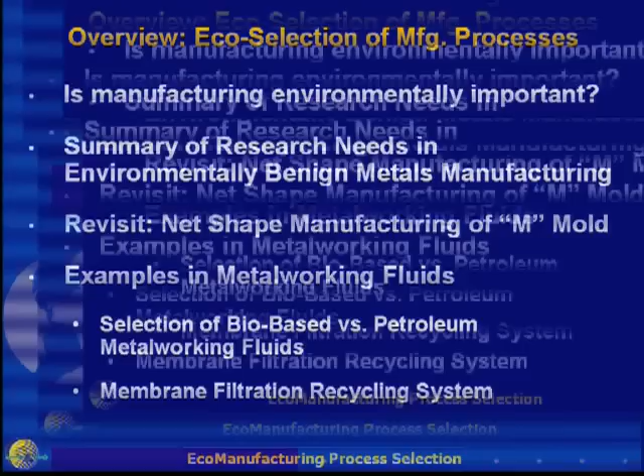Get into what needs were identified in terms of research in this area and environmentally benign manufacturing. We could summarize, and I think we only have time really to talk about metals, and we talk the most about metals this term. So we'll just summarize there.

We had a subgroup here of individuals who were involved. You see some folks from industry here. The big three are represented here. Some universities, government, EPA, and National Science Foundation, all represented here. And we basically sat down for a couple days. And

It's not feedback. All right. Not sure what that was. I don't have a cell phone on me.

Okay. Anyway, we sat down to talk about trends in the industry. And one of the big trends that the automakers noticed or brought to the floor was that they're really trying to get out of hard manufacturing. They just want to be assembling and designing, right? That's where the most value added is, where they can get the most return on the dollar that they put into it.

So we talked about the smart car, which is an extreme example of this. You just set up a campus, right? And now you've got different companies coming in and having some operations, and really it's a hub where all the assembly comes together.

There was a large degree of uncertainty identified regarding where products would be going, right? We've got hybrids now. We've got all sorts of alloys we can be using in the chassis. We've got fuel cells coming online. And more niche demands from consumers, so more variety in vehicle applications. So a lot of uncertainty they identified from the design standpoint.

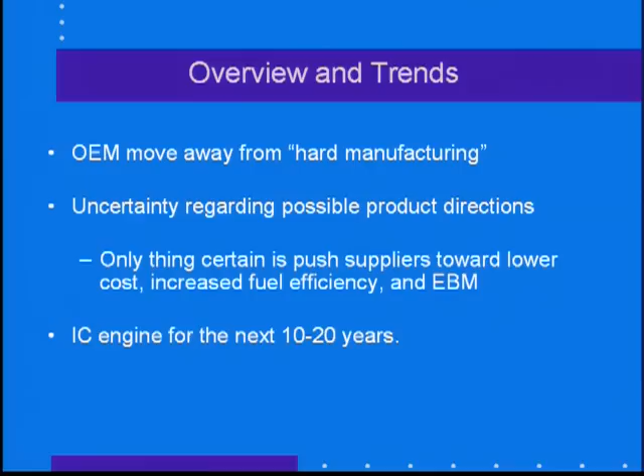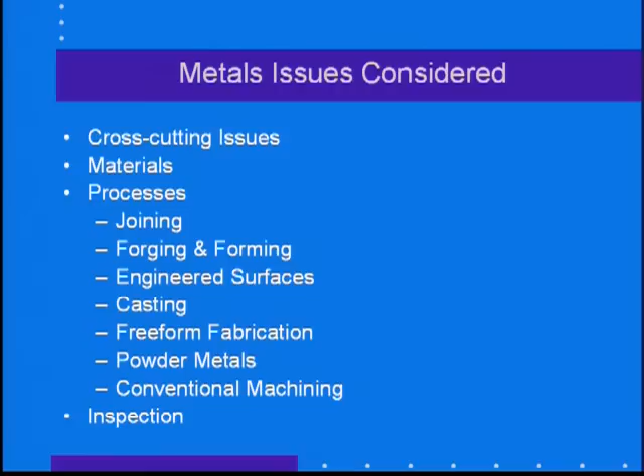We considered a lot of things in a couple days, cross-cutting issues, materials and processes, joining, forming, machining, freeform fabrication, casting, powder metallurgy, and inspection. But the overarching theme was what we've already talked about. I think the top two we've mentioned over and over again. The need for national priorities, not for any given company or designer to be setting environmental objectives, but for us to set some direction at the national level as a society, and partition those priorities into different industries and get everybody on the same page, essentially.

And then to provide tools and data for life cycle design support. What are the top priorities for a car? What is it in manufacturing, and what is it about the design? To enable designers to make these trade-offs. Those tools and data are largely unavailable. Process integration, hybridization, elimination. We've talked about net shape operations, eliminating downstream operations. That's what this point speaks to.

But supply chain relationships, especially as you have now decentralized manufacturing. What are the environmental impacts? Are you pushing environmental impacts now? You're essentially divesting yourselves from environmental impacts. So the supply chain relationship and understanding the impact of a given design on the total life cycle environmental impact of a product is going to get more difficult.

And education at all levels. What is the environmental impact? Tends to be lacking. Okay. So I don't think these are really prioritized. This is just a list of priorities. It's not necessarily in an order.

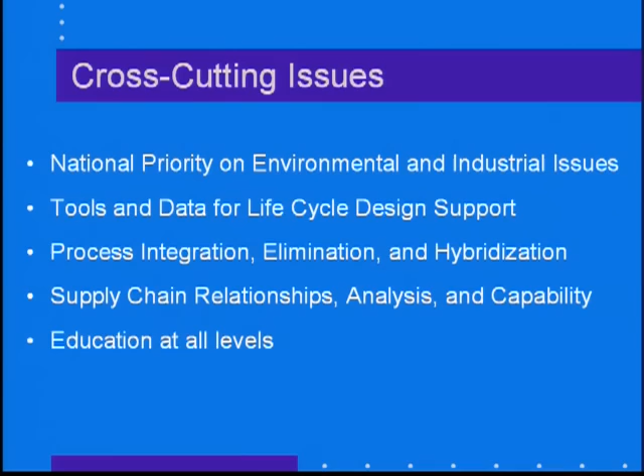We can start with life cycle system design, materials, material selection, manufacturing, recycling, of course. Net shape casting. I'll say more about casting in just a minute. Effluent-free machining. We've talked about metalworking fluids. That's what this point speaks to. Minimizing energy consumption, especially in welding. Metalworking tribology, engineering surfaces.

If we could get cast surfaces with good surface properties, then we wouldn't need to necessarily go to a grinding operation downstream, or an EDM, electrical discharge machining, operation downstream. So better understanding tribology. Most of our engineers, there's a very specialized few that really understand tribology.

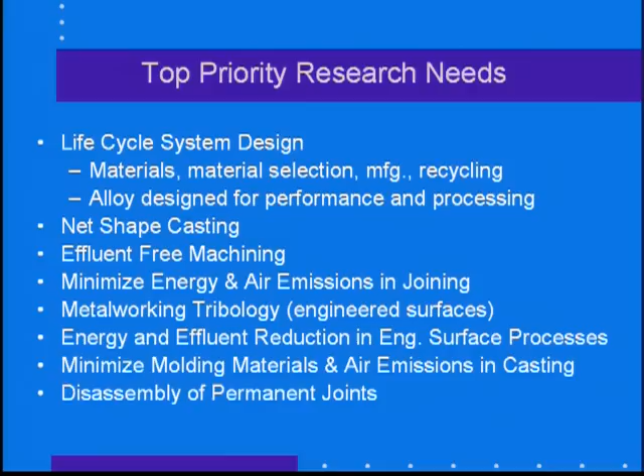In the surface operations, we could talk about plating, right, getting the effluents down, trying to minimize the use of toxics and energy in these processes. Air emissions and materials used in casting. Talk about casting again in just a second. And disassembly of permanent joints. We talked about these reversible snap fits before. What if? Would make disassembling a vehicle a lot easier.

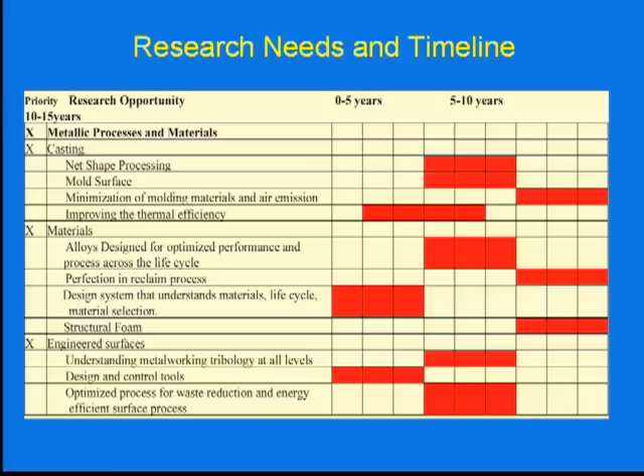Okay, on some timelines. You can see very little we expected to get done in the next 5 years. I mean, the point is, where you are in research now says a lot about where industry is going to be in 5 years. And there isn't much research going on. It's not a heavily funded area. In the 5 to 10 year range, we're hoping to get some funding in the next 5 years to do some of this work. But again, the slope's in the wrong direction. This was 2 years ago now. And a lot of this research hasn't even begun.

So we can get in a little bit deeper in terms of the processes themselves. Materials, again, these have come up in different forms already, right? Alloys for optimized performance. You can lightweight a product by going to an alloy, but when does that make sense? And is that alloy really castable or machinable? What are its surface processes going to be?

We could talk about recycling aluminum. You know that recycling aluminum is a good thing, but it turns out that aluminum recycling is very sensitive to the alloy. So they're not as recyclable as mixed materials as one might otherwise imagine. So sorting and purification become quite important. And the design system, again, this gets to education, understanding the materials and the implications of material selection.

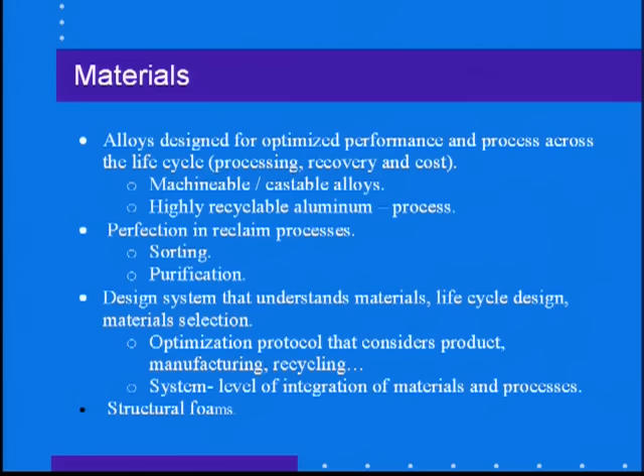One guy there, he's a big fan of structural foams, very lightweight foams that would be of a more polymeric sort of material, very low energy in terms of what's embedded in these foams, and then for transportation products. And this workshop was pretty much exclusively focused on transportation products. Probably be a good application, but you don't see too much structural foam in auto products.

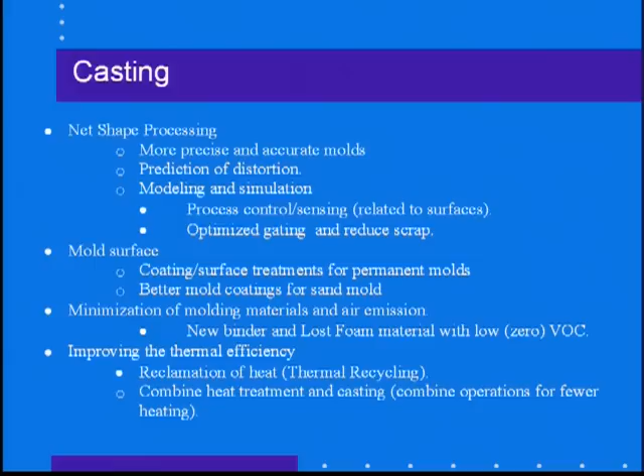Okay, getting into casting a little bit, net shape casting, great. If you could just sand mold a Buick, you'd be in great shape. But of course, we know it takes more than that. Precision is an issue. Casting, especially sand casting, doesn't get you very good dimensional tolerances, at least relative to what we need in today's highly engineered products. More precise and accurate molds would be a research area. Being able to predict distortion, we don't have very good mathematical models of this. And the surface finish, as I've already mentioned.

Optimizing gating. What's a gate? We got any casting people in here? It's what allows a metal or plastic to flow into a mold. Bingo. Right? So some of the metal or plastic's going to freeze up or solidify in the gate, right? And then you're just going to have to chop that off and then grind it down and get the surface finish behind it. So optimizing the gating to get reduced scrap. I mean, we could talk about casting as an engineered scrap operation, right? Because it's planned in. You know you're going to have it. So in that sense, it's wasteful.

Better mold coatings for sand molds. Get the sand to last longer, improve the surface finish, minimize downstream operations. Again, it's the theory there. Improving thermal efficiency. Can you recover the heat, right, instead of just wasting it? Or can you have continuous casting? You're making steel. You've got refined alloys. Can you just go straight to the product, right, without a solidification and remelting step? All things we could be thinking about.

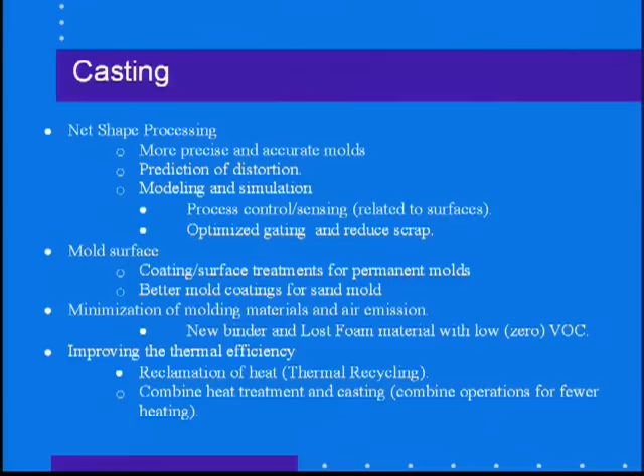Now the cope's going to end up on top. We can take that cope and put basically a flask around it, pour a lot of sand in there, ram it down, and make sure we've got a sprue, gates, and a riser. What are the risers for? Do we just have one casting expert here? It's for including material that, when the casting is solidifying, it basically shrinks down, so it can get some molten material to fill it out. Exactly, so it's back pressure essentially.

So the idea here, as mentioned up front, is you pour the metal into the sprue. It's going to fill up the part, but as it solidifies, it's going to densify. If you don't have excess material, you'll have voids. So you fill up the risers too, and as it cools, some of that material comes down. It also helps the residual stress characteristics.

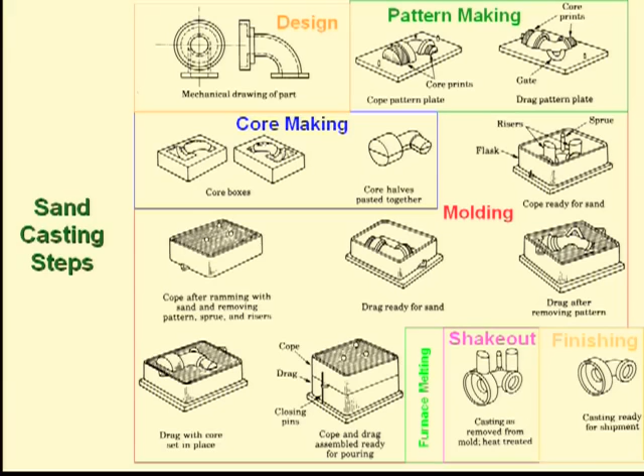Right, so you get the idea. When you hear about casting, you're probably thinking about sand. There are other forms of casting. Energy consumption, fluxes, electricity consumption depending on the type of furnace you're using. Air emissions, especially respiratory organics and volatile organic compounds. Think about water wastes, because you're going to clean the sand and keep dust down as you're handling it, so there'll be some water emissions and organic emissions in the water. So these are some of the pollutants. And there are other forms—it's not just sand casting.

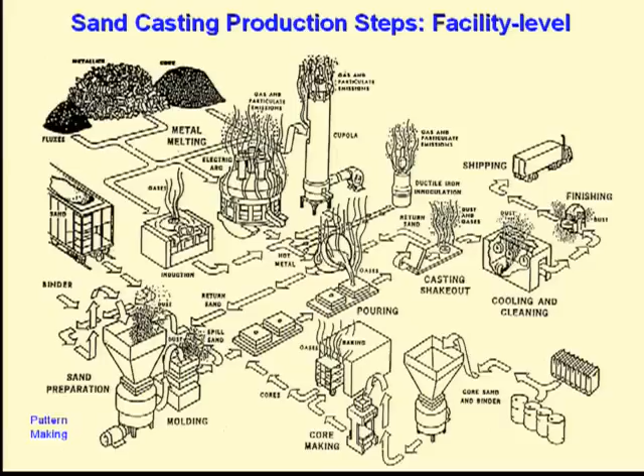It's not sand in the same way. The pattern is basically dispensable—disposable, or lost, or invested. That's the big difference here, because before you just had a hole or cavity you were filling metal into. Here you've got a formed part, maybe it's wax. Suppose we're making this part—some type of elbow or connector piece—we can basically make several of them on a tree, and this might be wax to start.

So what I could do is put a flask around it, and this is one way to do it, fill it with a material. It could be sand, or a refractory substance that's not going to be disturbed by the addition of molten metal. So I can fill it up with a refractory material and essentially melt out that wax or plastic. Now I've got the hole, and I can pour the metal in, shake out the refractory, then cut the tree down, machine it, grind it, get it ready to go. That's one way to do it.

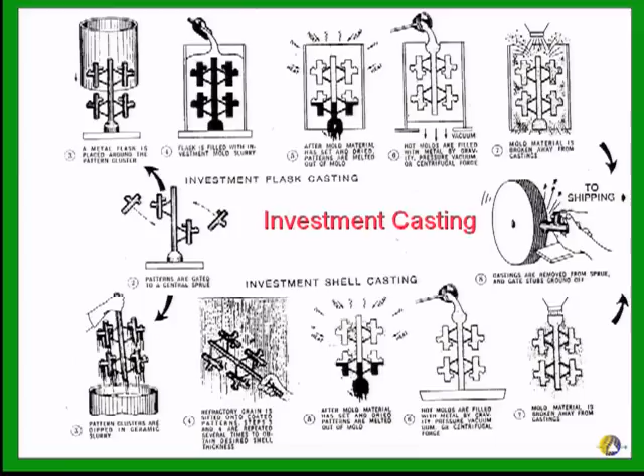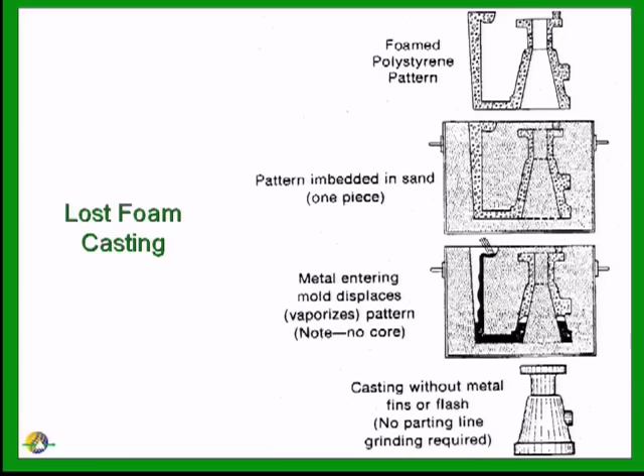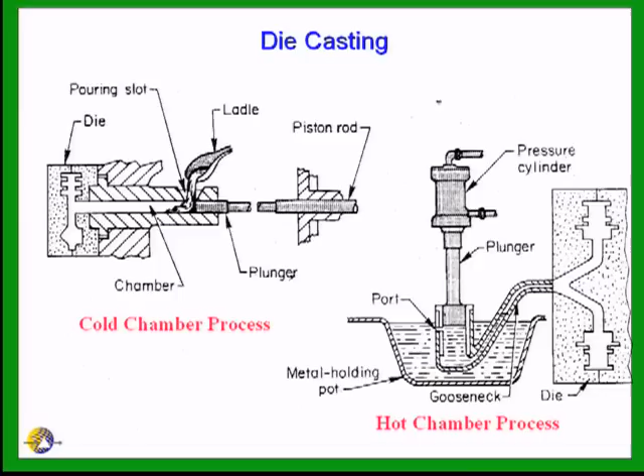Die casting is another form. I think most people are familiar with die casting - you have the cold chamber process or hot chamber process. So you can see why when you talk about environmentally benign manufacturing, casting tends to come up quite frequently. People want to avoid casting, or if you need to cast, then at least stop it there and try to avoid downstream operations.

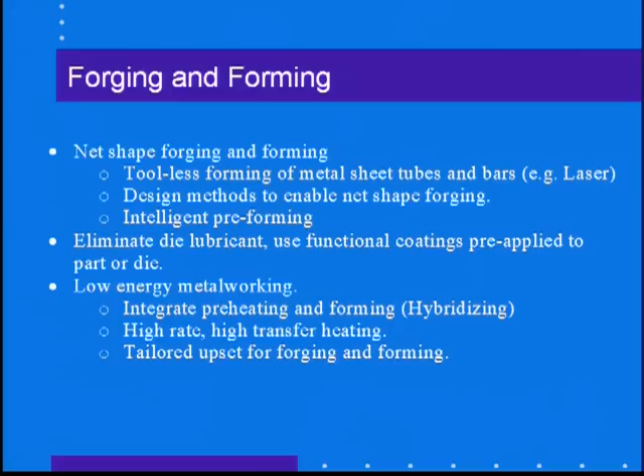Forging and forming - here it boils down to energy consumption and lubricants. You may be familiar with deformation processes. You have drawing operations here - where do the pots and pans you use in the kitchen come from? It's these types of metalworking operations. Drop forge - you may be familiar with drop forge tools or cold work tools.

You can have this here as a crankshaft. Again, it's an engineered waste product, because you're basically beating your parts into submission in a series of steps to get to your crankshaft. But you've got some flash here that's going to need to be removed, and you can do that in an intelligent way. You can design the part to minimize the waste or the energy you have to consume in a forging. These are huge presses that do these jobs.

And you need types of conversion coatings and lubricants that are not unlike cutting fluids. They're just more concentrated forms of the oils and fats, and sometimes you need to use acids. We talked about conversion coating to apply these types of lubricants to surfaces - these are the exact operations you would use them in.

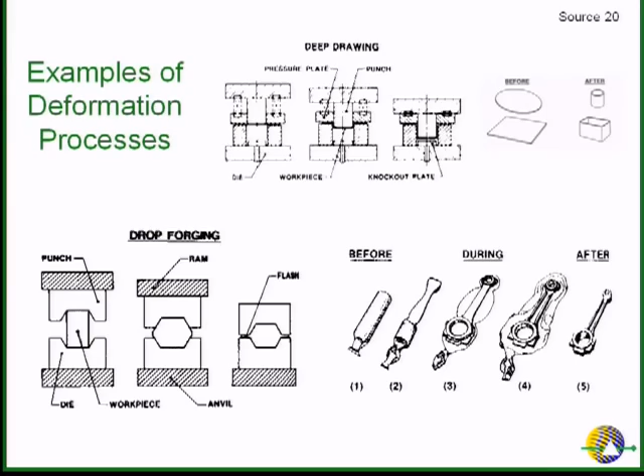Conventional machining - we'll talk a lot more about metalworking fluid. Well, maybe we will, maybe we won't, we've talked enough about it already this term. But just to make sure we have a visual of what these operations are.

This is turning. What's the idea of turning? The lathe - that's the machine you would use, so a lathe performs a turning operation. But what does it do to a part? Takes material off, in a circular manner. It's a metal removal process. Can you use square parts with it? Not unless you want them to become circles. The whole idea is radius reduction in general - you could tolerate a little bit of a square, but not too well. Normally you're just taking round billets and bringing them down, or ingots cast as round, and bringing them to a reduced diameter state.

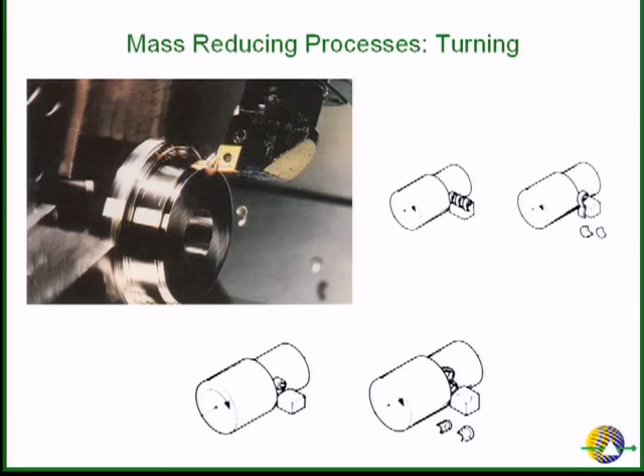All right, here's drilling - we're all familiar with drilling. What's different from a coolant and lubrication standpoint about turning and drilling? Anybody want to fancy a guess here? Which one requires more lubricity?

I would say drilling. Why? Because you're going inside the part. Yeah, there's nowhere for the heat to go. Right, nowhere for the heat to go? Yeah, so one's more of an external process and one is inside, and that's exactly why the fact that you're going into the part matters. And what else?

The little shavings have to get out. Yeah, they need to get out. So you need some pressure and you need some lubricity, right? So a lot of times you end up taking the coolant in through the spindle itself, and that provides pressure and lubricity to get the chips out.

And you may go through, especially in a gun drilling application, it's often found in auto. They call it gun drilling, like how you make a shotgun, very long and deep, but still relatively low diameter hole. Chips really got to get their way out, so the coolant is under very high pressure, very high volume application rates. You go through coolant like water.

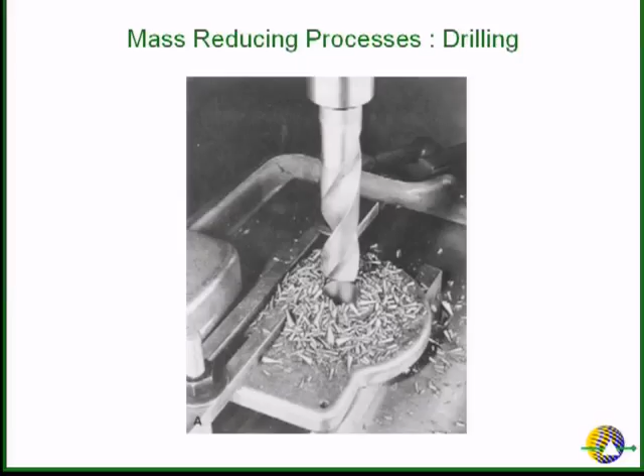Milling. From the terminology, we're just used to it as an external process, generally profiling here, as you can see. Grinding, a little bit different. It's external, but you're basically trying to get a very good surface finish here. You've got negative rake angles, as they'd be called, at a lot of different contact points, so lubricity is very important.

Often you'll use just a straight oil. There's a project a colleague of mine and myself are trying to start up now with an auto manufacturer on grinding, trying to get away from the use of straight oils in grinding and trying to recover chips from it, because it's a grinding process for camshafts, and they're not even recycling the steel because they don't know how to separate it from the oil. We think we can do it. In fact, we think seniors in our design class can do it, so we're going to try to make a senior design project out of this next semester.

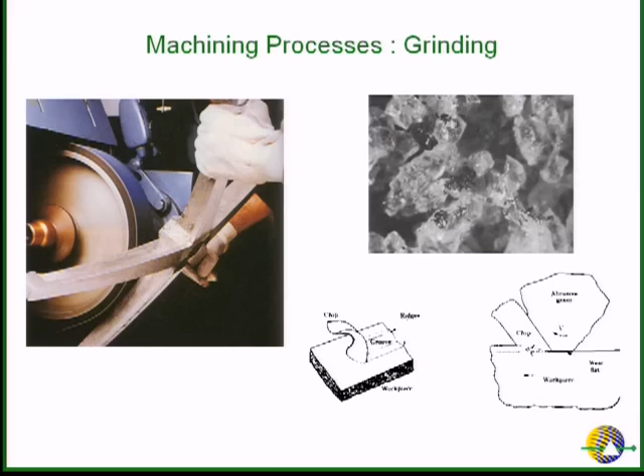I've got a proposal into the National Science Foundation right now to look at the environmental characteristics of this process and relate it to other ones, because we're using it more and more with higher precision needs, tighter tolerances, or parts in contact. We're using more and more electrical discharge machining. What are the implications for the environment? They can't be good. We would like to quantify them, bring them out to the light, and figure out how we can improve it.

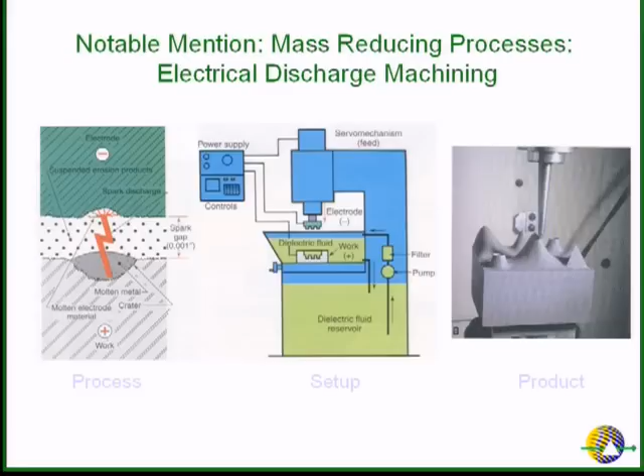Dielectrics are recovered, but the handling process is rather energy intensive, and separating out the materials is difficult. Can we get the chrome, or even the steel, or whatever the part is? Can we recover those metals? Right now it's hazardous waste.

Okay, another honorable mention here is electrochemical machining. It's different in that you've got electrodes in the presence of electrolytes. So you're basically creating microscale redox reactions, oxidation reduction reactions. Instead of blasting a metal off using electrical charge, what you're doing is chemically removing it by creating a redox reaction in the presence of electrolytes. This is more of an aqueous salt type electrolyte.

Again, you're still going to have metals in there, and in this case it's going to be much more soluble metals. So you'll get soluble metals to some degree, like in the other process. But because you've got aqueous solutions, you're going to have metals in water that you can't necessarily remove easily—you can't just let them settle out.

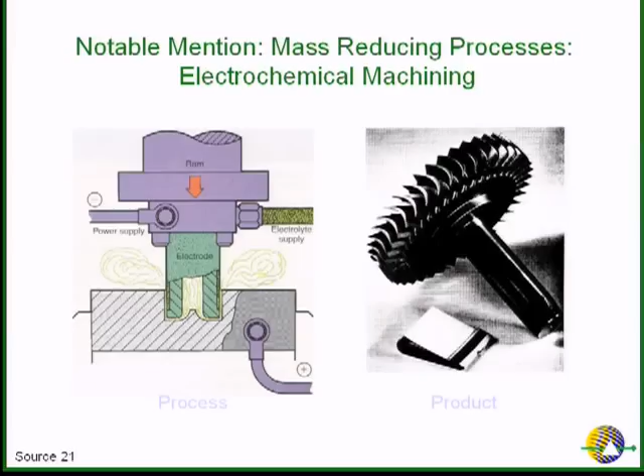But if you look at these micro turbine blades, it's pretty cool—I mean, you can't machine that. And the residual stress characteristics are really good; you don't have residual stresses here.

Okay, so, oh, that was cool. Didn't mean to do that.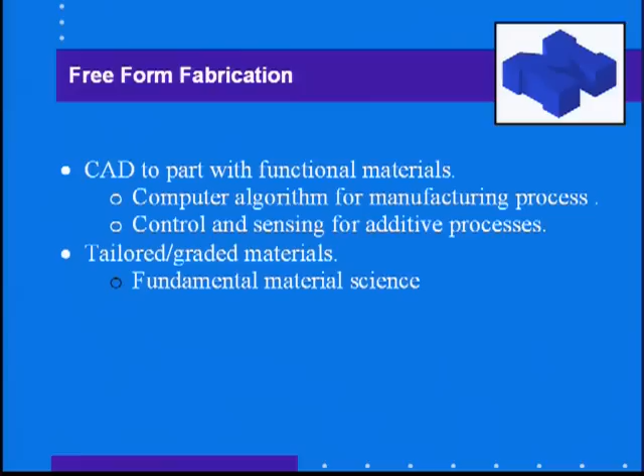Wow. We've talked about freeform fabrication, right? The production of the M, that's why I put it there—that was our case study. We talked a lot about additive versus subtractive manufacturing, and that's where I had my aha moment, because I've got a colleague down the hall who's one of the...